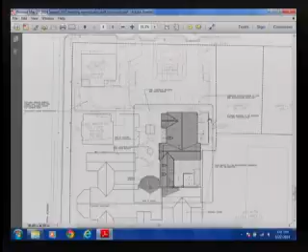My understanding from Jim Lowen, who's the architect, is that due to the distance on the east side of the property next to Junior's, from there to the units, there was a short distance, and that was the reason for the guardrail. The reason why there's not a guardrail on the south side is due to the fact that the units can be placed 8 foot 4 inches away from that parapet wall, so the distance is much larger on that end.

So there's no guardrail right here now? Now, that one is there. If you go back to the elevation above that, where you're looking at the parking lot elevation, there's not a rail going back toward the building due to the 8 foot 4 dimension away, the unit sets away from the parapet wall.

Are there mechanical units on either side of the gable here? Yes, there are. And they're just not shown on this front part? That's my understanding. I would have to double check that with the mechanical drawings. I'm not quite sure. I know there's some mechanical up there, but there's also 2 levels of that flat roof.

How tall are the air handling units? Jim's got them shown on there. I think the tallest one is a little over 40 inches tall.

And how high is the guardrail? The guardrail, I think he's got it shown at 3 foot 6 inches. So you probably got a 16-inch parapet, something like that in there, would be my guess. I don't have the section through there.

And the distance away from the edge of the roof, do you know how far that is? On Junior's side, it's approximately 3 to 3.5 feet to the units. From the parking lot side going north, it's about 8 foot, 8'4", I believe is what he said.

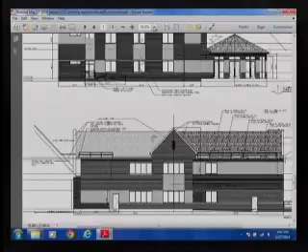If you'll move over toward the parking lot - it's hard to see the dimension, but it's right there at the end of that screen. It's like 2'2" or 2'4" on top of the parapet wall, the roof handrail. I don't see it. Come over to the left. It's really difficult to see, to the left of the screen.

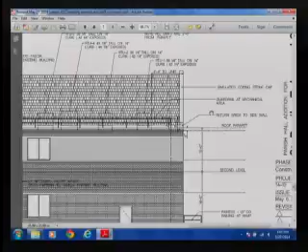But I don't see anything that says it's 2'2" or anything. It's on there, it's just very difficult to see because of the shading of the roofing. This is not on there.

Oh, right here, I see. It's very difficult to see. Two foot in there. I don't think they put it on this version - it's not on there earlier. No wonder I can't see it. I know my sight's not very good, but I can't read it, I think it's around 2 foot. Here it is - if you can see the screen, right where I'm circling, it says 2'10". I think it's 2'10" right in here. I might be able to get it a little bigger too.

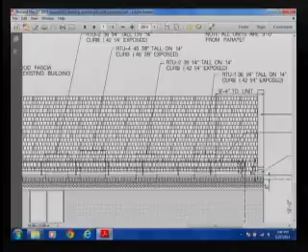Yeah, this is the very end. 3'6" - is that the top of the railing? I think what he's saying there, the 3'6" is to the bottom of the coping right there. Okay. And the 2'10" would be the railing above the parapet, apparently. That's correct.

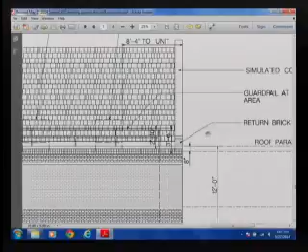8 inches? Is that 8 inches the roof parapet? I don't know what that is. It says right here. Guess that would add up - 2'10" plus 8 inches should be 3'6".

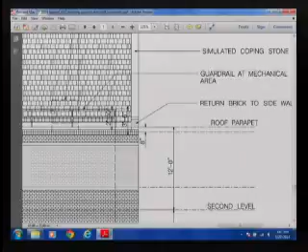And so the railing is a see-through railing, so you'll be able to see the equipment through the railing? That's my understanding, it's a split rail, yes - an open rail.

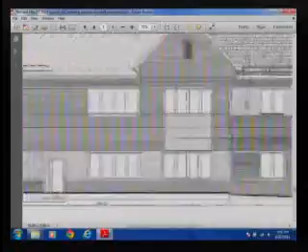I think that original parapet should have been designed so that it shielded the equipment. And of course, we don't have any perspective here - we're looking straight on as if we're 20 foot up in the air, looking straight ahead. Correct. But I don't recall any discussion about it, but it would be unusual, I think, for us or for planning commission to be looking at a building that has exposed equipment on top of the roof.

We usually require that to be screened with a parapet, and I would think especially in the historic district we would require that. And I would think that if you're up on a lift, you might see the equipment looking straight through, but from a normal ground level or 5 to 6 foot eye level, you shouldn't see any equipment, but you will now see these railings sticking up above the parapet. Right, that's what should be seen. We would love not to have the railings.

Well, that's a code issue, is it not? Apparently that's a building code issue - if the equipment is within a certain distance from the edge, you've got to have a certain height, and the 8-inch parapet or whatever it is, 10-inch, 2-foot parapet, whatever it is, isn't enough for that safety issue. And the roof - looks like the parapet starts 26 feet up from the ground. Yes, that's what it appears.

So it's hard to get a good perspective because it's on the second floor, and it's 26 feet, and probably even more than that because of the bottom of this railing here.

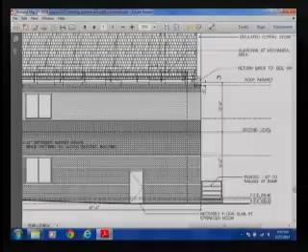I'm not sure what a short parapet wall might do. Might help, something taller. Well, I'm guessing they've got to get up to a total of 3'6" that they're showing here by code. So that means that's it.

Was any thought given to making the rail enclosed so you couldn't look right through it to the equipment, or just extending the parapet wall up? My concern, from the owner's perspective, is that taking that parapet wall up to the height of 3'6" would mess with the aesthetics of that elevation, because you can't do that on the opposite side. I'm not sure, Mr. Becker, if there's been any thought put into other than just a split rail up there to meet the code.

Did it say in here what the railing is going to be made out of? Colors and that sort of thing? My understanding is it's just a typical steel handrail, split handrail, two-line rail, painted, whatever color would fit with the probably the color of the coping of the parapet wall.